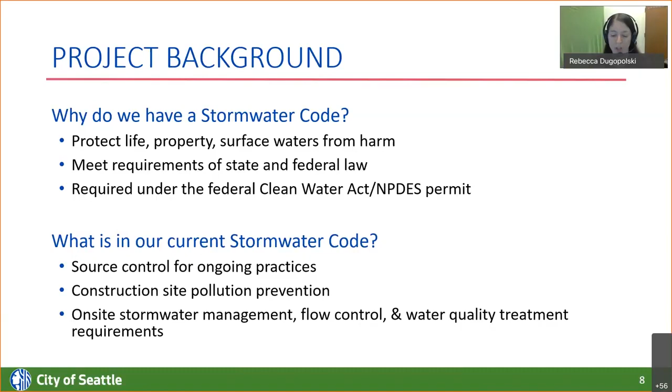I wanted to walk through a little bit of project background. Those of you who've joined past public meetings probably recognize these first couple slides. I always like to go back to why we have a stormwater code and manual, and the intent: to protect life, property, and surface waters from harm, meet requirements of state and federal law, and fulfill the Federal Clean Water Act and National Pollutant Discharge Elimination System permit. What's included in the current and future stormwater codes is source control for ongoing practices, construction site pollution prevention, and requirements for on-site stormwater management, flow control, and water quality treatment. That's just the high level—obviously there's a lot more in there.

A little bit of project background: this project is driven by the new Phase 1 permit that came out July 1st, 2019 and became effective August 1st, 2019, and also the subsequent update to the Ecology Manual, the Stormwater Management Manual for Western Washington. We've had internal city staff workshops and a series of meetings starting in summer and fall of 2019. We also had external outreach meetings starting back in October 2019, when we could still have in-person meetings.

Then we had two webinars with the release of the spring 2020 public review draft, and one public webinar last fall with release of a portion of the manual and code, focusing on Volume 1, Appendix B, Appendix I, and the Stormwater Code. This webinar today focuses on the full code and manual and related codes.

Here is the overall timeline and where we're at. So we've worked our way through the first and second public review, and we're here on the third public review. As I mentioned, that's the full manual, related codes, Director's Rules, and the full code as well. And then Sherell mentioned we're moving through the legislative process this spring and targeting that effective date of July 1st.

2021 to meet ecology's requirements. So I wanted to just jump forward of what we're focusing on. As I mentioned, the legislative process is coming up, so we'll have city council review and a public hearing associated with that process. And then we'll be working on implementation tools and training. So you'll see some things coming out later this year to support applicants and plan reviewers, and also trainings related to the manual updates.

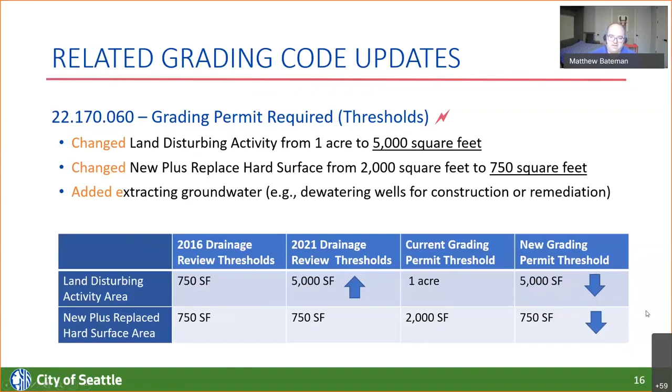For new and replaced hard surface, we're keeping the 750 square foot threshold for drainage review. And we're modifying the grading code so a permit is required when there is 750 square feet of new and replaced hard surface.

We also changed some of the exemptions. There was a utility exemption that exempted all utilities from grading permits, so we changed that so new installation will not be exempt in the ECAs. For new stormwater systems for short plats and subdivisions, especially those shown on the preliminary drainage plans, repair and maintenance will still be exempt for existing utilities, and utility installation outside of the ECAs will be exempt.

We removed the exemption for underground storage tank removal and replacement due to the potential impact those may have. And we revised the exemption for work on railroads to make it clear that if the drainage review is triggered for the stormwater code, you do need a grading permit. This is because the Stormwater Code administers a federal program, the Clean Water Act.

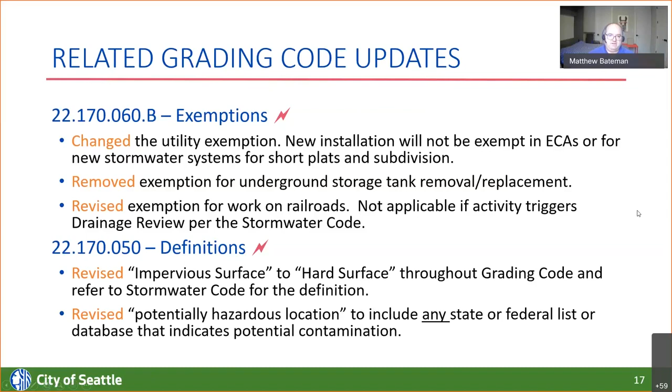So we changed some definitions. We went through to line up with the Stormwater Code and changed anywhere that said impervious surface to hard surface, referring to the Stormwater Code for the definition. We've also revised the definition of a potentially hazardous location to include any state or federal list or database that indicates potential contamination. Previously it was more specific, so we broadened that to capture any project that may have contamination.

We modified the plans and information required when there is a building permit, mostly to clarify when a separate grading permit or a separate grading plan will be required versus when the grading information can be shown on other plans, like site plans, drainage plans, or street use plans. And the biggest change is when a civil engineer is required, and it has to do with the stamping.

We also clarified which elements should be shown on the grading plan, and clarified that the site plan required with the grading permit shall be prepared per the department standards that will issue the permit. The one last thing we did is added back the authority for the geotechnical reviewers to require minimal risk statements by a geotechnical engineer in geologically hazardous areas. This is something that had been in past grading codes but was missing for some reason.

And so that wraps up the grading code. This grading code may come out sooner with some of the building code changes. It's a little up in the air because those are up in the air, so it may be pushed back and be more in line with the stormwater code, but it may come out a couple months ahead of the stormwater code.

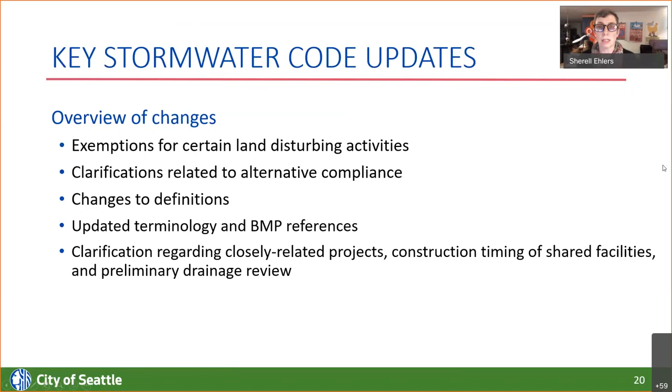Continuing that list, there's also adding minimum requirements for mainline extensions and the public drainage system, or clarifying them. Updates to on-site stormwater management lists for all project types, revision of flow control requirements for parcel-based projects and roadway projects, revising flow control standards, specifically adding an existing condition standard and updating the peak control standard, and also allowing for landscape management plans as an alternative to water quality for natural turf and landscaped areas.

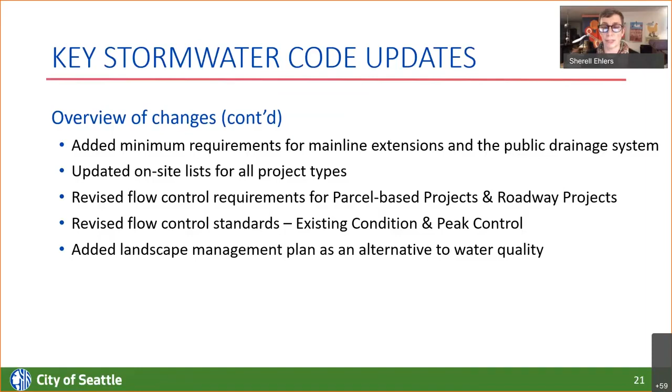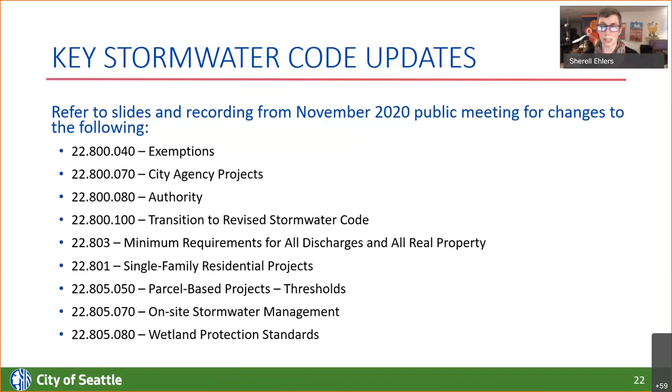Since there's a lot of information to cover today, we're not going to repeat what we talked about previously, as Rebecca mentioned. So the items shown on this slide were covered in the fall 2020 presentations. If you want to hear those presentations, you can go back and look at the PowerPoint and the recording. Today we'll just be focusing on what was changed since November.

So for definitions, most of the definitions shown here were updated and shown in the November 2020 public review, except for the following three definitions. And again, as Rebecca said, it's the red lightning bolt that signifies what has changed, just as a reminder.

We have added to the definition of drainage system curb and gutter as part of the drainage system, which aligns with our MS4 for municipal separate storm sewer system -- I'm missing an S in there -- National Pollutant Discharge Elimination System permit, or MS4 NPDES permit, aligning with that by adding curb and gutter. Then we updated the stream definition to be consistent with the creek definition we previously updated, though I didn't realize both creek and stream were in there. That's just to match the Washington Administrative Code typologies.

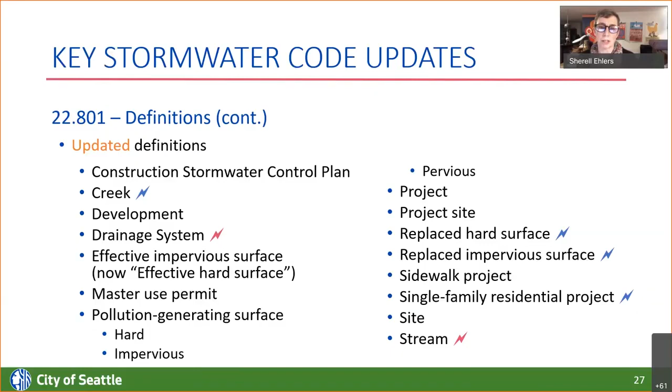And then we just added a definition for stormwater plans and specifications. So there's a lot of items here, but just the changes from previously.

In the section for minimum requirements for all projects, we revised the language based on feedback from the last review period, specifically related to updating the timing of construction of stormwater facilities that will serve multiple proposed lots, parcels, or tracts, based on the feedback we got regarding permit issuance of building permits and the like. So we revised that language based on that feedback.

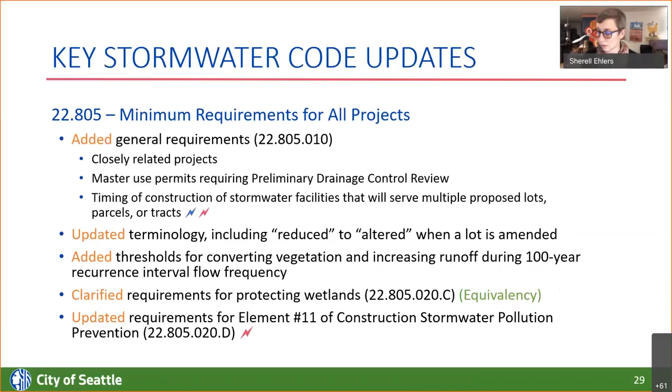We also added requirements in the source control section for all projects, requiring training for construction employees to prevent source control issues during construction, and also cleaning up any contaminated soil subject to spills during construction.

This section is about extensions of the public drainage system. In the current 2016 code, there's already a requirement to extend the storm drain, but that requirement was in the authority section of the code and sometimes was missed. So the requirement was added to the minimum requirements for all projects, just to be more transparent about when a project would have to extend the public drainage system.

Since we added that initial requirement based on private property, we have requirements associated with private property, such as what we're calling projects not conducted in the right of way -- in stormwater vernacular, parcel-based projects. It's similar to what the requirements are right now as enforced: if it's a large project greater than 5,000 square feet, new and replaced, and without a piped public drainage system -- the piped part is different -- abutting the public place, or other projects that pose hazards.

That section mirrors what was already in the authority section, but we also added a new requirement for projects conducted solely in the right of way. This basically applies to transportation capital projects, stating requirements for the public drainage system that were missing in the stormwater code before for transportation projects. So that is a new section in concept.

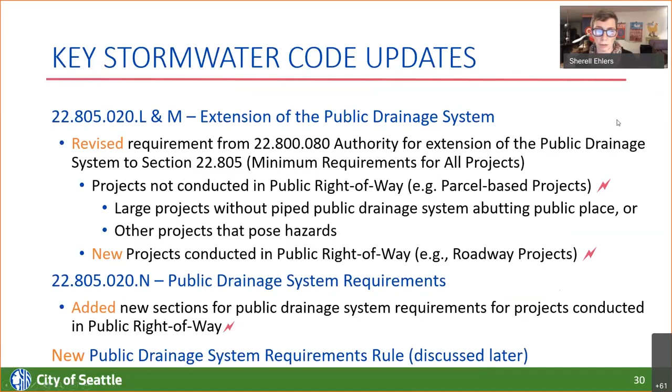We covered this slide in the last meeting, but since it's so comprehensive, I'll just go quickly through it. It basically talks about the thresholds for parcel-based projects and the change in threshold for single-family projects. What this table shows are the changes in thresholds, which are shown in bold.

One of our goals in updating the code and manual was simplifying things where we could. And that led to most projects aligning at a 5,000 square foot new plus replaced hard surface threshold.

With a few exceptions. Going through the list, the threshold for on-site stormwater management is not changing. It's still either 750 square feet or 1,500. That's the same.

For combined basins, an analysis was completed by the combined sewer team and determined that a smaller threshold for projects in the combined basin should be implemented to help mitigate the impacts of development. The current threshold for the combined is 10,000 square feet, and the proposed is 5,000. So you can see that it's aligning with that 5,000 square foot threshold as well, for both simplicity and system needs.

In mitigating impacts of development, for creeks and small lake basins, the threshold is currently 2,000 square feet, but that is proposed to be up to 5,000 square feet. So that's actually a less stringent threshold than what was previously in the 2016 code.

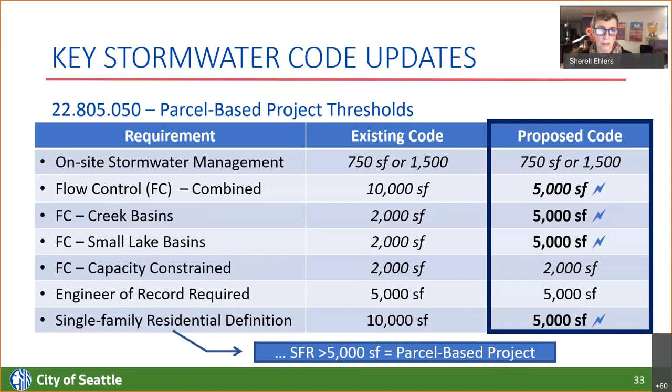So next, let's see, we're on the same. I'm looking at notes here and in the slides, so it's a little discombobulated.

For this current public review period, as I mentioned previously for the capacity constrained system, we said you don't have to do flow control if you can demonstrate there's downstream capacity, but just clarifying that that only includes ditches and culverts in the system.

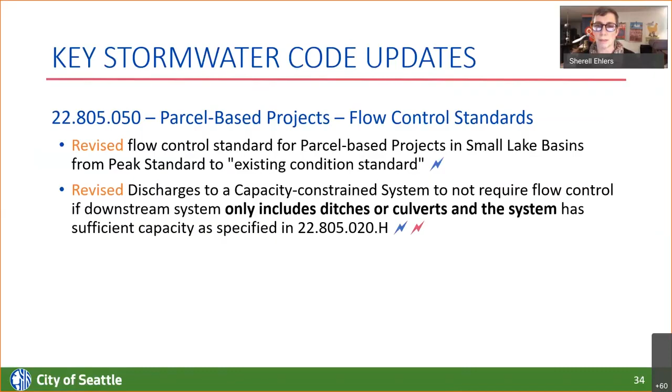Similarly, the same change has been updated for the roadway project. You can go to the next slide. The other bullets, like we've been saying, were presented in the fall 2020 presentation.

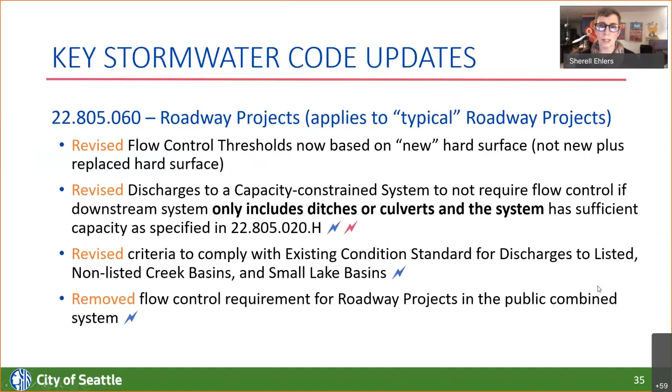These two next slides were presented last time, but I'll go over them again since most projects have to do on-site stormwater management. This slide highlights the changes that generally apply to single-family residential projects and parcel-based projects.

The first change is adding that infiltration trenches can be used for non-roof hard surfaces, but evaluation is not required. Also, this new BMP was added to category 2.

It's called the sidewalk trail compost amended strip. It's not the best name — if you have recommendations on naming that, please let us know. It's basically a CAVS and can be used in lieu of permeable pavement, and that new BMP can be used on any of the on-site lists.

We also moved the non-infiltrating bioretention, vegetated roofs, and rainwater harvesting down to category 4, which causes a shift for the former category 4 BMPs to become category 5. One of the reasons we did that is because we're reducing the size required of non-infiltrating bioretention.

Instead of being sized at the 5% area to match the infiltrating requirement, the sizing is only required to be the water quality sizing, which is a smaller size than is currently required now for non-infiltrating bioretention.

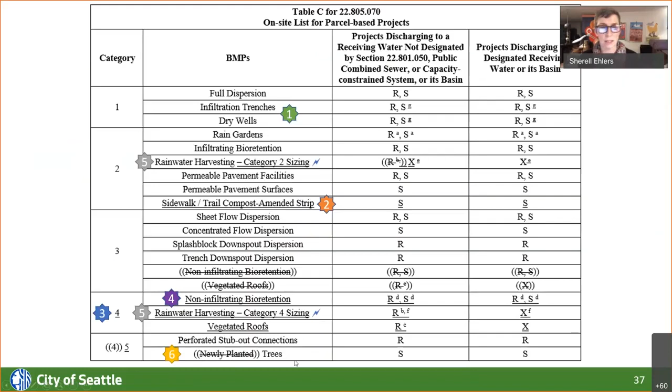For the trail and sidewalk project, similarly to the single family and parcel based project, this sidewalk trail compost amended strip has been added to category 2. And as a separate category at the bottom, trees have been added to both the trail and sidewalk projects as well as roadway projects.

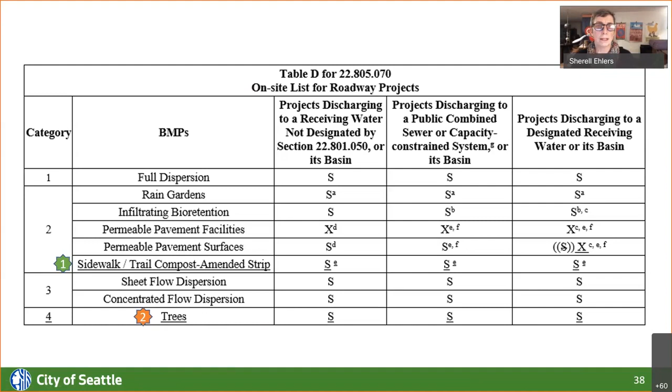So now moving on to flow control. I think I'm a little behind in time, so I'll try and speed it up.

For the 2021 Stormwater Code update, there's 2 changes related to flow control other than the wetland required changes from ecology. One is adding the existing condition standard. We talked about this last time, but previously the existing condition standard said you had to match up to the 50-year peak flow. It's been altered so that if you're a non-creek basin, you only have to match up to the 25-year peak flow, but if you're in a creek basin, you have to match up to the 50-year. That's because of equivalency with ecology's permit.

Basically, the existing condition mainly applies to small lake basins and roadway projects.

The other change for flow control is the peak standard was updated, to reflect downstream impacts of the project and to optimize control based on smaller storm events. The larger storm event standard is not changing, it's still 0.4 CFS per acre at the 25-year storm event, but a lower standard for the 2-year and a new standard for the 5-year are included at 0.07 and 0.1 CFS respectively.

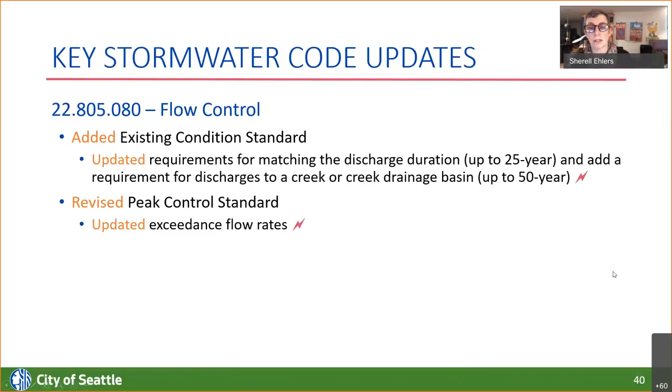The next few slides are similar to what I talked about last time. There's basically 3 different scenarios I'll go through in these 3 next slides. The first one is for infiltrating bioretention, and the 2 others are for detention vaults.

One thing to note is in the fall we had a higher standard. Basically what we're proposing today results in smaller BMPs than what was proposed in the fall.

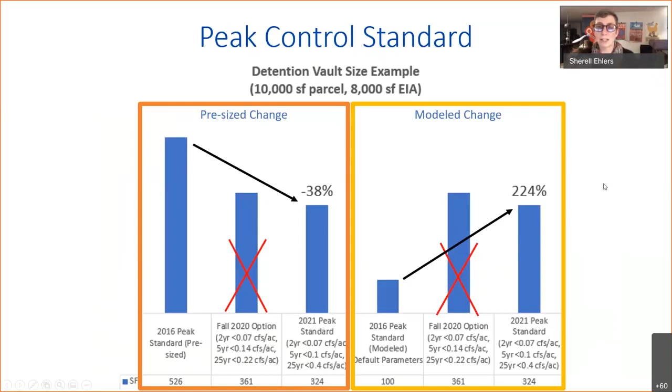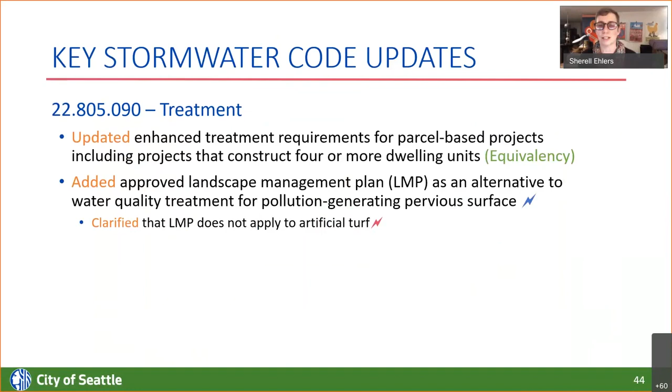So very quickly, once landscape management plans were allowed, we proposed, and Ecology accepted, that we could use landscape management plans in lieu of water quality requirements for pollution generating pervious surfaces. But we just needed to clarify that does not apply to artificial turf, just to be clear, because we don't want to have those discussions.

And finally, just two comments that we got from Ecology were making sure that we say you have to maintain or follow your landscape management plan, so we changed that. And then also, if you sell your property, you need to inform future owners that a landscape management plan exists and that you need to follow it.

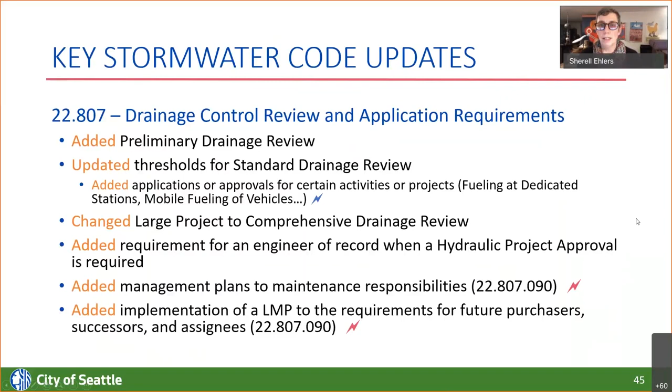And then now I'll go through this new director's rule, which further implements the code language that I just previously discussed.

So to help and support the implementation of the stormwater code, the city is creating a new SPU-specific director's rule. The content of the rule clarifies five sections of the stormwater code. The first three are existing stormwater code requirements, which include approved point of discharge, ensure sufficient capacity, and the requirements to extend a main line, which are in the authority section but are now included in the minimum requirements for all projects.

In addition, new language was added for mainline extensions for transportation projects. And then finally, just noting that you have to follow rules promulgated for the public drainage system is also part of this document. So going through the main parts that people are most interested in today...

Ensure sufficient capacity is existing code language and is not a new requirement in the code, but further clarification of this requirement is mainly taken from King County's stormwater manual, so this will all look very familiar if you're used to doing work in King County. The requirement is to mitigate the direct impacts of the project that would cause or increase downstream issues, and it's not intended to fix existing issues.

The rule further clarifies existing code language on performing a downstream erosion and capacity analysis a quarter mile downstream from the project discharge point. The analysis will be based on a 25-year event and most often applies to the ditch and culvert system that has limited capacity.

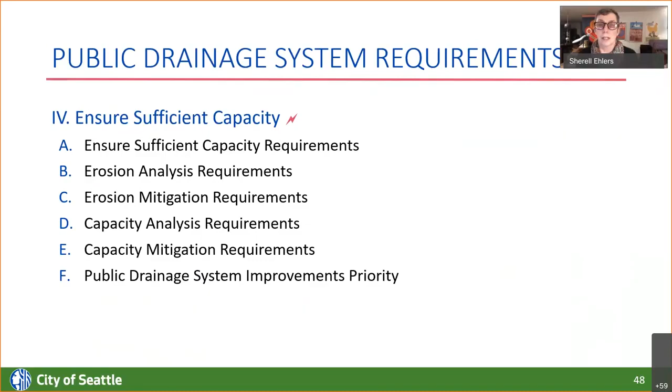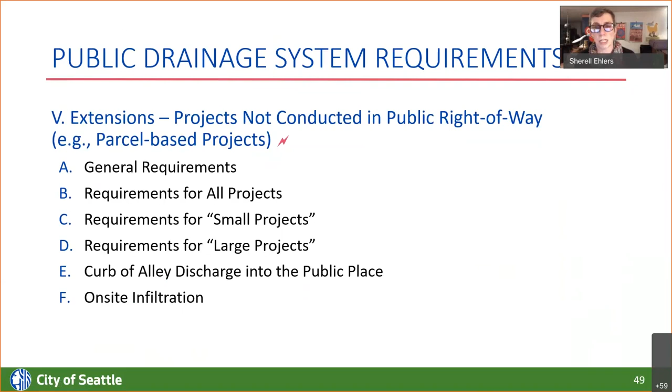And finally, the last part of the document is basically taking language from an existing client assistance memo, or CAM 1180, which a lot of you I'm sure are familiar with, and incorporating that into a rule, noting track changes from there so you can specifically see where the changes are from that existing client assistance memo. The requirements for this apply to the public drainage system and not public infrastructure. So that's my last slide, and I'll hand it back to Gretchen.

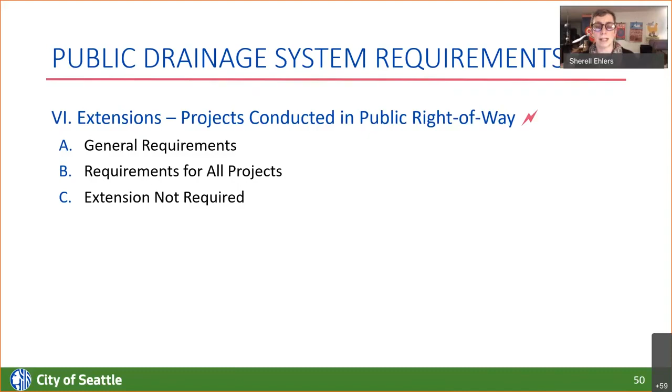And I'm a little bit over.

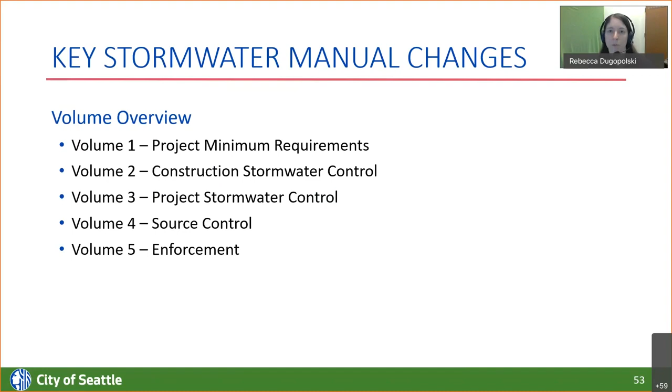Also, an errata sheet was posted today, and I'll be talking about that a little later, but it includes several updates to some of the proposed sizing tables in volume 3. Definitely take a look if you're interested in sizing factor updates, because that's the latest changes based on some recent modeling updates. I have a slide covering which tables that includes.

Volume 1, similar to the code, we talked about this pretty extensively during the November 2020 public meeting, so you can refer to those slides in the recording for the following sections listed here that we didn't change in the winter 2021 draft. If you're interested in these sections or chapters, make sure you take a look at those slides and recording from that last public meeting.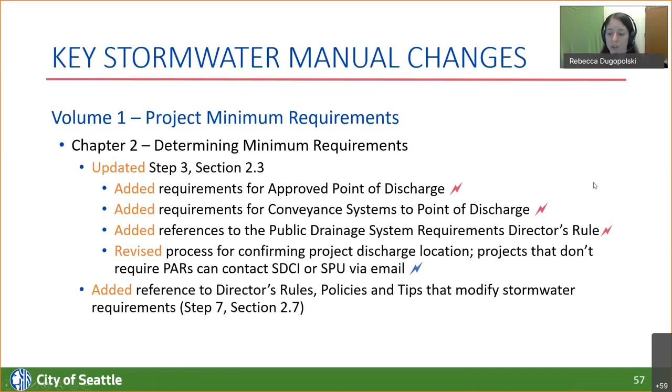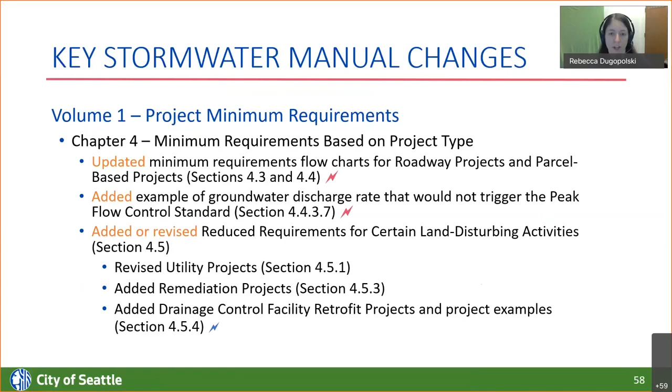We also added an example of a groundwater discharge rate that would not trigger the peak flow control standards. You can find that at section 4437. So that's my volume 1 — that was pretty fast. We did a lot of updates on volume 1 in the fall, but just a few minor tweaks here for the winter 2021 draft.

Also some pretty minor changes in volume 2. We just have one slide on volume 2 today, but wanted to highlight a couple things. You'll notice there's just the one red lightning bolt here under minor BMP revisions, and if you take a look at the summary of changes table, you'll note there are 5 different BMPs that have had revisions since the spring 2020 review draft.

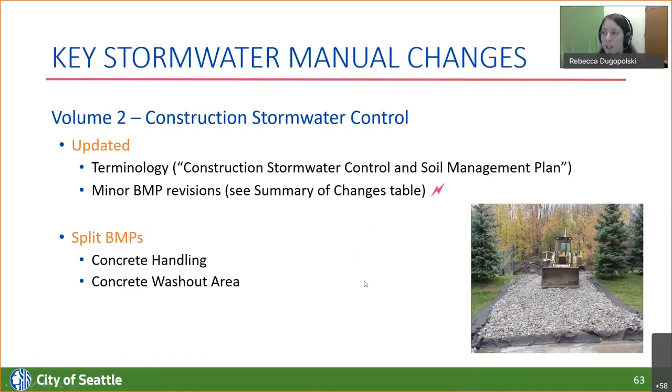Some pretty minor changes related to stabilized construction access, some minor changes in figure 14, which is in the filter fence section, some additional references in the building repair, remodeling, and construction BMP, clarified requirements for discharge structure and the temporary dewatering BMP, and also updated some of the timelines in table 9, which is the solid waste handling and disposal requirements related to recent updates there. Take a look at that in the summary of changes tables, and that'll walk you through the changes to volume 2.

Volume 3 is kind of where we want to spend most of our time today, since that's where we had the bulk of our changes in this latest draft, and the bulk of changes that those of you that work on BMP design are probably interested in as well.

So here again, I'm going to focus on the red lightning bolts. Many of these items have been further revised and clarified for this latest draft. There's one related to guidance on the infiltration investigation map — a fairly minor edit, but take a look at the language there for further clarification on how that should be applied. Figures, as I mentioned, are integrated into chapters 3 and 5 of volume 3, so take a look at those. There are also BMP updates and clarifications — we'll walk through these in more detail, but throughout chapter 5 there's further refinement on BMP design and sizing and the figures there as well.

We also added, as we mentioned previously, that new BMP — the sidewalk and trail compost amended strip — but we made some further refinements in that BMP, so we'll walk through what some of those changes are. Added some new figures, and also here's a reminder to adjust the HSPF parameters — I've got a couple slides related to this as well, so we'll walk through that.

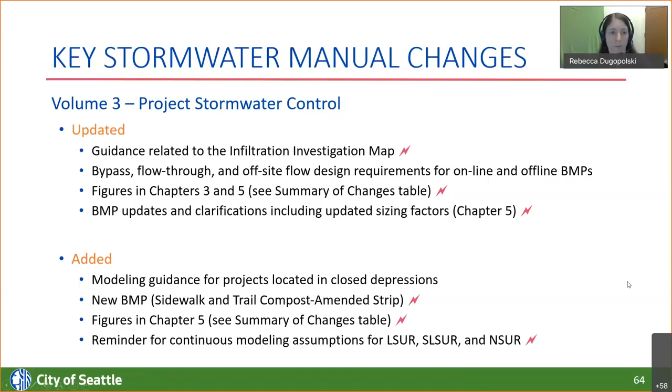Sherelle had mentioned there are some pretty substantial changes related to sizing when you're changing these HSPF parameters. So I wanted to point out, for those of you actually doing the modeling, where to find those in case you haven't done this modeling in a while. Those three parameters are LSUR, the overland flow length; SLSUR, the slope of overland flow; and NSUR, which is Manning's N.

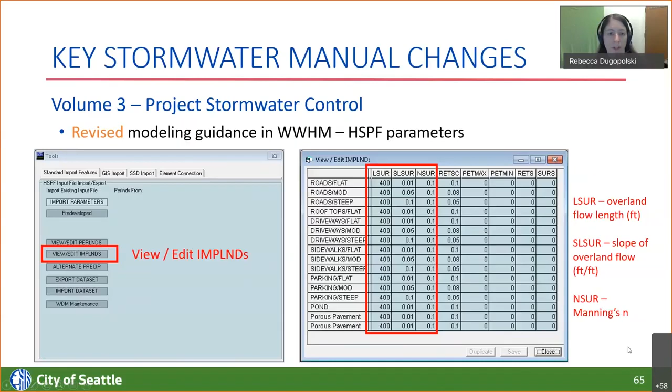Within WWHM, this is the Tools menu — there's View, Edit, Pervious and Impervious here. If you click on View, Edit Impervious, that's where you can change your LSUR, SLSUR, and NSUR for your different land use types. So that's where you find that in WWHM, and it will be highlighted in your output report, so you'll know which ones you've changed.

In MGS Flood, it's also on the Tools menu or Tools tab. Here it's under HSPF, runoff parameters, and parameter region, with three dots that say Edit HSPF Parameters. In MGS Flood, you get both your pervious and impervious on the same screen, and again LSUR, SLSUR, and NSUR are the three you should be changing. As you change these in MGS, it'll underline them in red so you'll know which ones you've changed, and that will also show up in your output report.

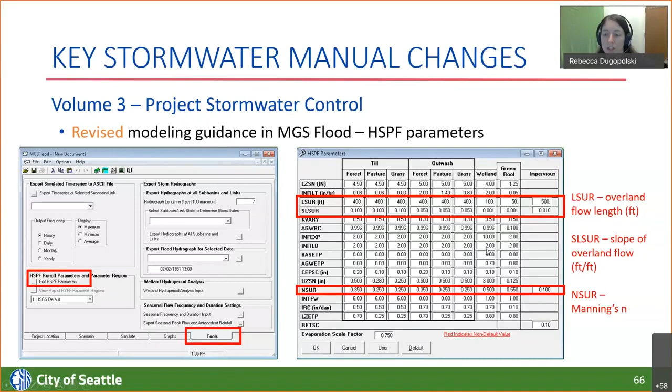Other changes in volume 3, starting with some of the overview chapters. In chapter 3, as I mentioned, we clarified guidance related to the infiltration investigation map, along with some clarifications related to water quality treatment and which BMPs apply. In chapter 4, we added a new subsection with modeling guidance for wetland hydroperiod protection, and added a reference to the new director's rule on public drainage system requirements. We also moved some content that was previously in chapter 4 — some shifted to volume 1 and some to the director's rule — so it's not taken away, just moved to another part of the manual. We also clarified where infiltration testing can be performed in section 4321.

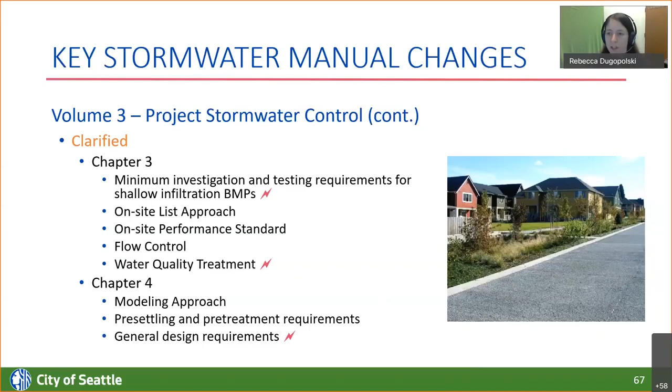A couple things I wanted to point out: the soil amendment BMP has a new figure. The sidewalk trail compost amended BMP — again, that new BMP Sherelle mentioned — we'll talk about in more detail in a couple slides. And for infiltrating bioretention, we clarified the design criteria related to mulch, updated the figures within that section, and also updated the sizing factors.

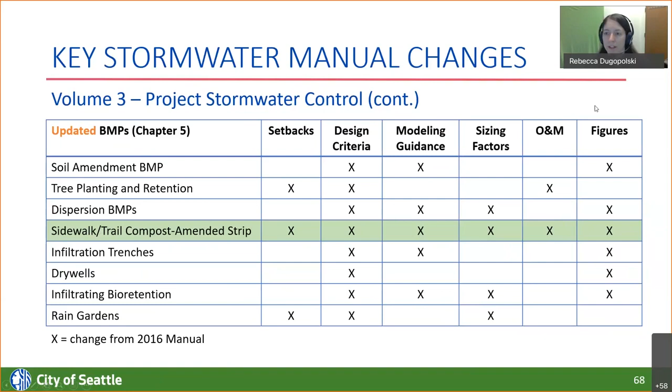Our next set of BMPs, permeable pavement facilities, that's one where we updated figure 5.17 and also updated the sizing factors. For infiltration chambers and vaults, I don't have a separate slide, but I wanted to note this has been updated pretty substantially from 2016. We didn't make a lot of changes for this latest round, but do take a look, there's a lot of new text and some updates and clarifications made since the spring 2020 draft.

Rainwater harvesting, again I don't have a separate slide for that, but Sherelle mentioned it's now listed in Category 2 and Category 4 of the on-site list. We did add some sizing guidance there, so if you're doing rainwater harvesting sizing, take a look at that. We also walked through some steps on how you would evaluate that within the modeling framework.

For detention ponds, pipes, and vaults and chambers, for detention ponds we only made minor revisions for this draft, but I'll be going over some of the design criteria that apply to all types of detention systems. Detention cisterns have no new edits other than the sizing factor updates in the errata sheet. And for other detention options not listed here, we didn't have any edits in that section.

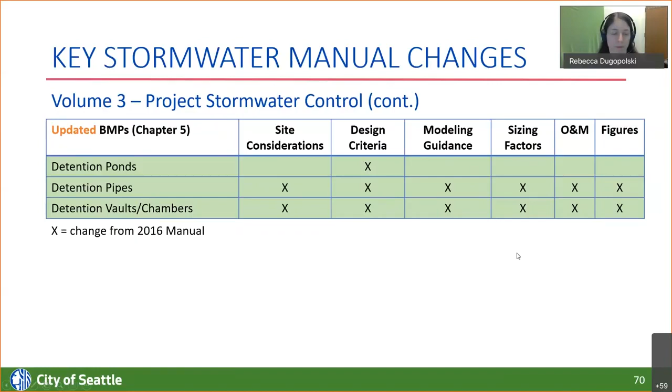On this slide we'll be talking about non-infiltrating bioretention in a couple slides, so we'll focus on that a bit more—that's another one that's been updated pretty substantially. Also just wanted to touch on proprietary and emerging water quality treatment technologies here at the end of Chapter 5.

I don't have a separate slide on this, but wanted to highlight that there was a BMP added back in the spring 2020 draft, the MWS linear modular wetland. We clarified the application of offline versus online flows when sizing those BMPs. You may also notice the current draft doesn't include any mass loading ratios, or MLRs, right now. That's something we were working on at the last minute to simplify that process and make things more consistent, to make it easier for vendors to get an MLR in place. We're still working on that process, so you'll notice some TBDs in that table within the section.

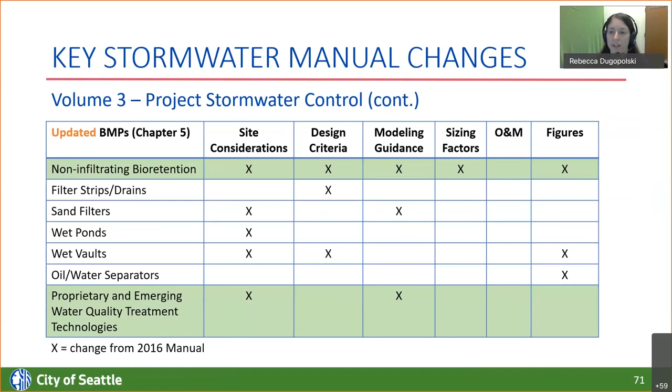So as I mentioned, I wanted to focus on some of these major changes that have been made either since the 2016 manual or this latest draft. Here are the areas I want to focus on today.

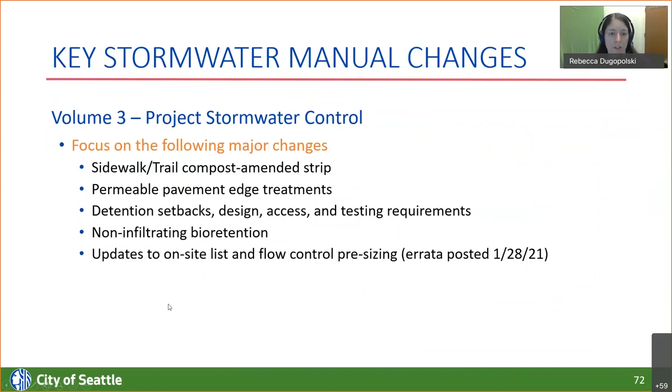We'll start with the sidewalk trail compost amended strip. As we noted, this is a new BMP, and the figure is also new and has been updated for this draft. A few reminders and clarifications for this latest draft: this BMP can be used for trails or sidewalks up to 25 feet wide. All widths—the hard surface, the BMP, the level spreader—are measured perpendicular to the edge of the hard surface adjacent to the BMP.

We also clarified the type of vegetation that's acceptable—turf or dense ground cover is typical, but additional shrubs and trees can also be added to the design. The overflow path must be vegetated and at least 10 feet from a building or property line, excluding the right-of-way. We also added sizing factors and clarified how to model the BMP explicitly.

On the next slide, we wanted to point out a couple new figures. These haven't been updated since the spring 2020 draft, but just wanted to note figure 5.19 and 5.20—there's a concrete edge example and a geomembrane edge example. These are both examples of possible edge treatments, but the city will also allow other options, including proprietary ones. This just helps provide guidance on what different types of edge treatments can be used for permeable pavement.

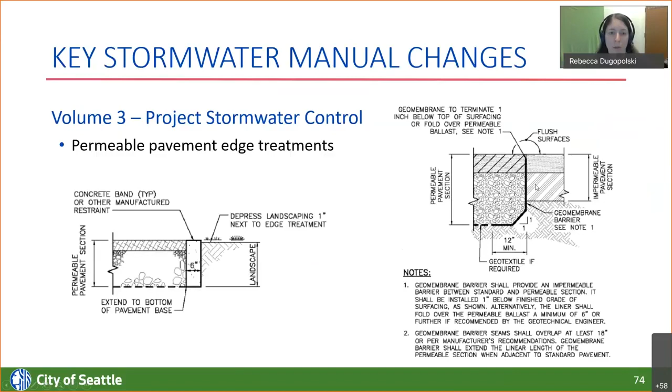Detention ponds, pipes, and vaults and chambers—wanted to note that these setbacks were added previously, but since it's a big change from the 2016 manual, I wanted to highlight some of these items today. These are added setbacks for all detention BMPs from ECA steep slopes and landslide prone areas when geotechnical analysis is required. For these three types or iterations of these BMPs, there's a 200-foot setback from the ECA steep slope or landslide prone areas.

So if you're using a modular stackable chamber, such as an R-tank, a detention chamber with an open bottom, or a CMP detention pipe, then you've got this 200-foot setback. We've also added design criteria for modular stackable chambers—that's a change from the 2016 manual—and revised and clarified exfiltration testing requirements for both pipes and vaults.

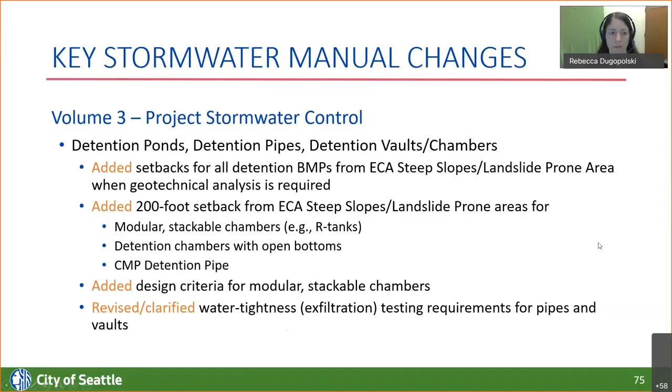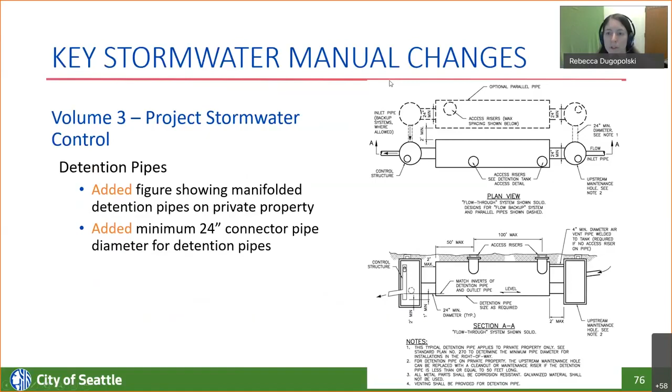Looking at detention pipes specifically, there's a new figure 5.26 that shows manifolded detention pipes on private property. And we added a minimum 24-inch connector pipe diameter for detention pipes, which you'll note on the figure.

Non-infiltrating bioretention was also a BMP that had some pretty significant updates from the 2016 manual. There's an added setback from the top of the ECA steep slope landslide prone area. We've got revised liner requirements that refer you to Appendix E, and a reference clarifying the land use code section looking at front, side, and rear yard setbacks. Also noting that storage capacity doesn't apply to non-infiltrating bioretention.

And reduced sizing factors when used for the on-site stormwater management list approach, so that's more aligned with the water quality treatment sizing — the sizing factors have gone down. Also wanted to note that using non-infiltrating bioretention to meet the peak control standard is no longer applicable. With the new standard, we found that it really just can't meet the peak standard, so there are changes in the table related to that.

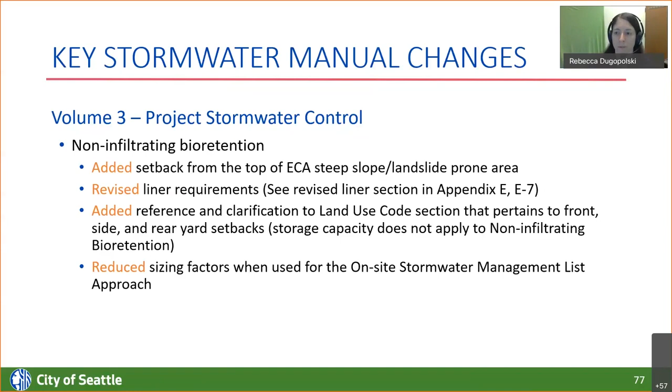The last thing I wanted to point out, as I mentioned, there's an errata sheet that was just posted today, and it was up on the website recently. So when Matthew does his walkthrough at the end, he can point you towards where that is. There were changes to 8 different sizing tables — 3 of those are related to on-site list sizing for infiltrating bioretention, rain gardens, and non-infiltrating bioretention.

There's also pre-size flow control credits that have been updated for permeable pavement surfaces. We've also distinguished that that's now with and without check dams, since with the latest model update there are some pretty significant changes depending on whether you're modeling with or without a check dam. So that's been added to the table there.

For detention pipes, vaults, and detention cisterns, that's one where we added or modified the contributing area ranges. And as Cheryl mentioned, we also added the orifice diameters to make clear what was used for the pre-sizing.

And then, as I mentioned, for non-infiltrating bioretention, the peak control standard is now not allowed for 12 inches of ponding, where it was previously. So that's the list of tables that have been updated.

Volume 4, we just have one slide here, so fairly minor revisions in the winter 2021 public review draft — those were in BMP 3, 9, and 16, if you want to take a look at those in the summary of changes table. Also the rooftop dog run BMP, which is our new BMP 8, got updated, so there are some changes there. And then referencing the landscape management plan and integrated pest management plans, which are now in Appendix I, that got added as well — some additional links and clarifications you may want to take a look at if you use Volume 4.

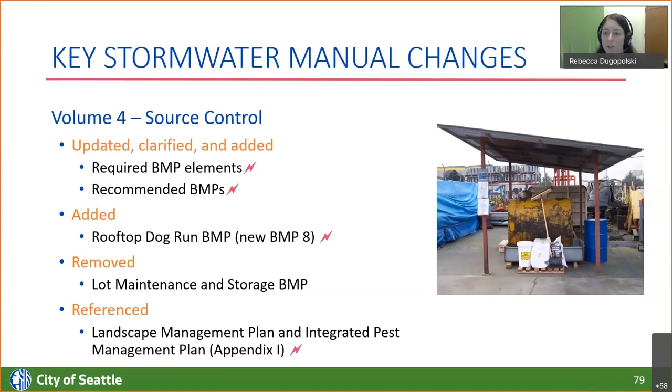All right, next I'm going to cover our changes in the appendices. Here's our list — we've now got Appendix A through I. You'll note that Appendix B used to be related to Volume 2, and is now repurposed and related to Volume 1. And Appendix I got expanded to add the landscape management plan requirements, if you took a look at that during our last public review period in the fall.

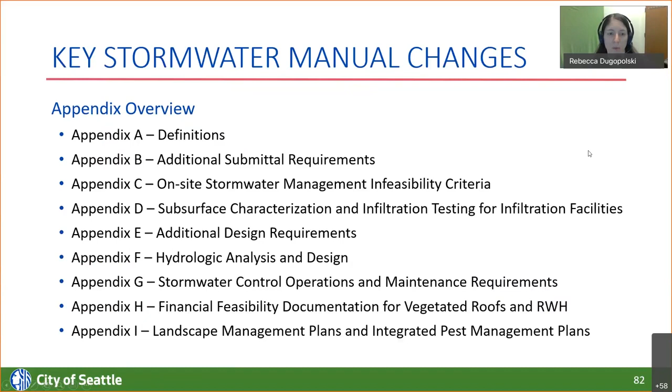So Appendix A is the definitions appendix right now — that's just a placeholder and refers to the code, but it will be populated for the final manual. Matthew, did you want to jump in and briefly cover updates to Appendix B? Yeah, Appendix B has 2 sections, and the first one is meant to describe the drainage review process for MUPs, especially subdivisions, short plats, lot boundary adjustments, and unit lot subdivisions. We did some further refinement in those sections that you should take a look at.

Also, the timing for full subdivisions and short subdivisions of when the shared stormwater facilities, we tweaked that code language just slightly, just to make it a little more flexible for developers.

And we've described some of the utility easements that will be required on plats, and I expanded the section on the lot boundary adjustments. So this is a brand new section, so I encourage everybody to go through and take a look. If you still have questions about what's happened, what's going on for drainage review for MUPs, please

let me know. Please comment, and we can try to address that. And the other section is just kind of the drainage report format and content. So we made a few more clarifications and refinements in there, and clarified that you may not need everything in this. It's not going to be a strict adherence to this form, but it shows you all the elements that may be required. Okay.

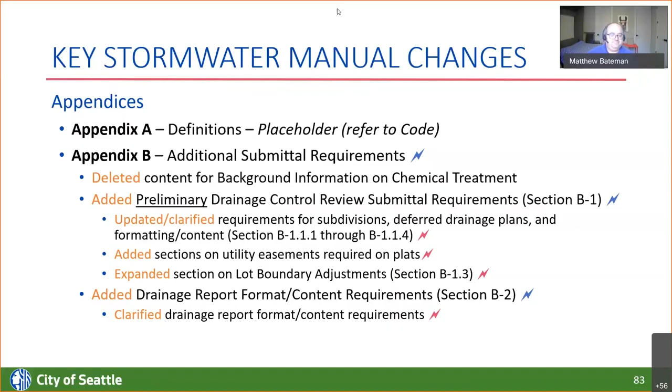All right, and I think you've only got one slide this time, so all in one slide. But Matthew had some more detailed information that he presented back in the fall. So if you're interested in some more detail behind Appendix B, that's there, or just take a look at it and read through it. So great, thanks, Matthew.

I wanted to also cover Appendix C. There were a few updates to the on-site stormwater management infeasibility criteria. So the main things I wanted to highlight here were related to added and revised infeasibility criteria.

This first one is just a clarification. It's not a change in the requirements. So there was kind of this petroleum, chemical, liquid, hazardous waste storage tank note kind of tucked in at the end. So we just integrated that to make that a little bit cleaner language there. So that's not a change, just a modification of the current language.

There is a new infeasibility criterion related to skate parks, bike parks, and sport courts for permeable pavement facilities and permeable pavement surfaces. So that got added in Table C3. The infeasibility criteria for sidewalk, trail, compost amended strips got added as well, so you could take a look at those also in Table C3. And then there's 3 new infeasibility criteria for non-infiltrating bioretention that you can find in Table C5.

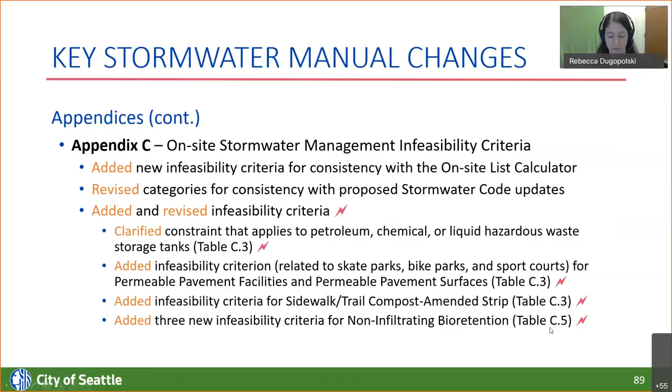Appendix D had some pretty minor changes for this draft. So there are some pretty minor clarifications in the groundwater monitoring section, D5, one minor modification in section D8.1. And then I think the main changes came in this acceptance testing requirements section, D-8.2. Mainly just clarifying that step 1, observation of subsurface conditions, and step 2, infiltration testing of differing soil conditions, those are recommended but optional. And step 3, which is your acceptance testing of your backfilled BMP, is a required step. So you can find that in section D-8.2.

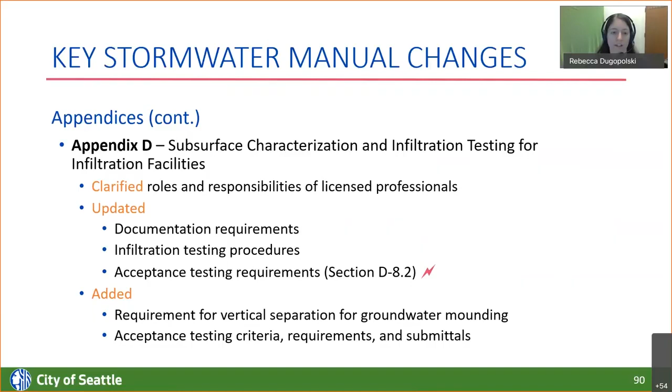In Appendix E, there's some minor changes scattered throughout. The main thing here, some updates to the plant list. Really, that was just adding design and O&M considerations based on a review by a landscape architect. Removed a couple of species due to winter dieback and availability of other species that are better suited for bioretention function, and some things that require extremely wet conditions.

So just taking a look at some of the species that were listed in there. There's a few changes, a few things got removed. Some others were aggressive spreaders and things like that, so a few species did come off that list.

Also in the latter part of Appendix E, there's a section on dry well sizing. So there's a new table that got added there, Table E27, for dry well sizing downstream of bioretention sized for the on-site stormwater management standard. And the preceding tables to that, we also reincorporated the sizing factors that were in the 2016 manual, so those got added back in, but there's this new table at the end.

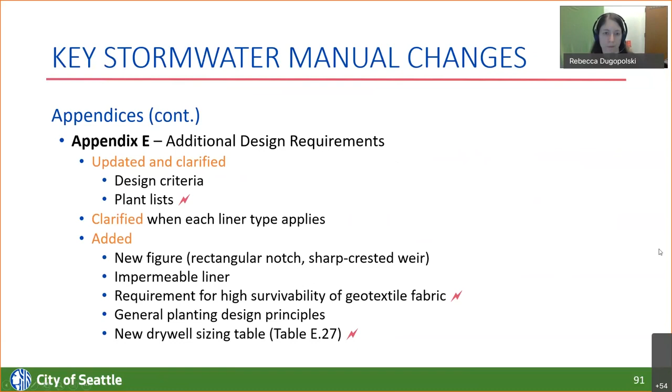For Appendix F, some fairly minor changes here. We added a section on, or added some language on the required HSPF parameter modifications, which I mentioned previously and had those couple of slides with the screenshots from WWHM and MGS Flood. We also added some language from the ecology manual on how the flow duration standard is calculated in continuous model. So that's something that's already kind of baked into the models, but it's helpful to have that background language to know how it's actually calculating the flow duration standard. So we folded in that language there.

There's a new updated rain gauge figure and some updated text and a figure related to tidal influence and sea level rise, so those got updated based on some recent references. And then some additional text related to how the on-site performance standard is applied in the latest version of MGS Flood. There was some older language in there, so we just updated that to be a little more clear with how the models actually apply that standard and calculate that standard.

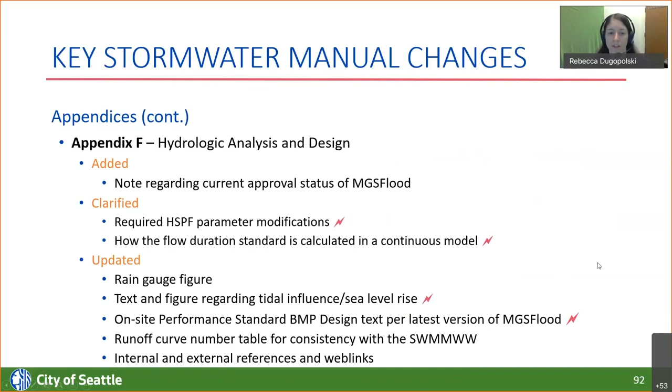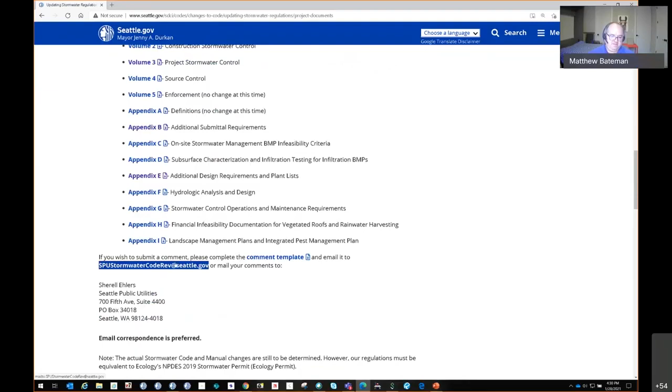We've got the draft grading code in here, and there's a small draft land use code that we're going to implement. And then we have each of the volumes of the stormwater manual in here, along with all the appendices, and another link to the comment template and the email address. We also have some general background about the stormwater code manual, and an overall timeline.

So I'll stop sharing now and give it back to Gretchen. Excellent, thanks so much, Matthew.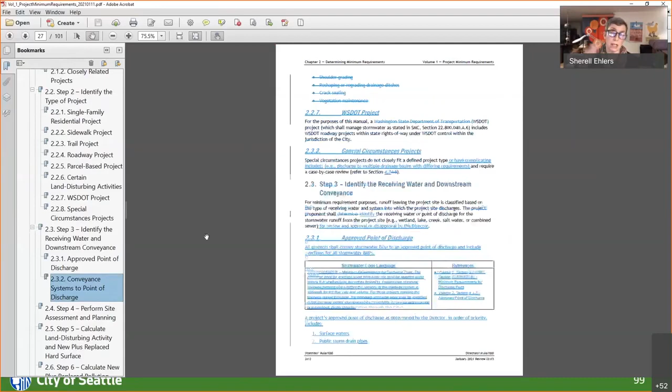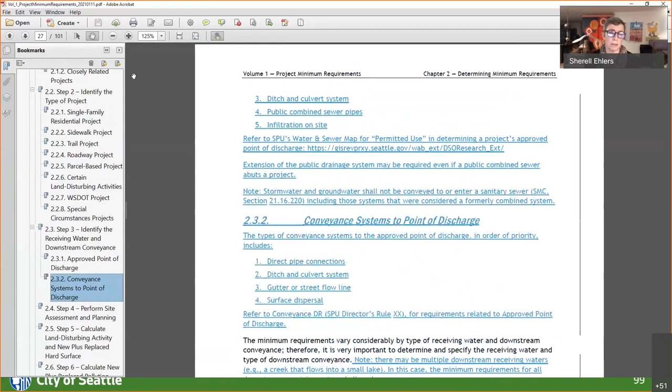So this isn't new language, it's actually just taken from Volume 3 and moved up to Volume 1. When it says infiltration, it basically means you need to go to a water body, connect to a public drainage system, and then it goes down the list to connect to combined, and then on-site infiltration. We still want infiltration through on-site stormwater BMPs, but for the larger storm events, tying into the city system is what the priority list is about.

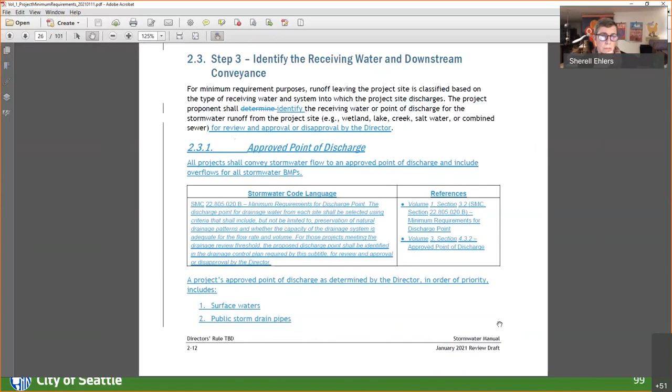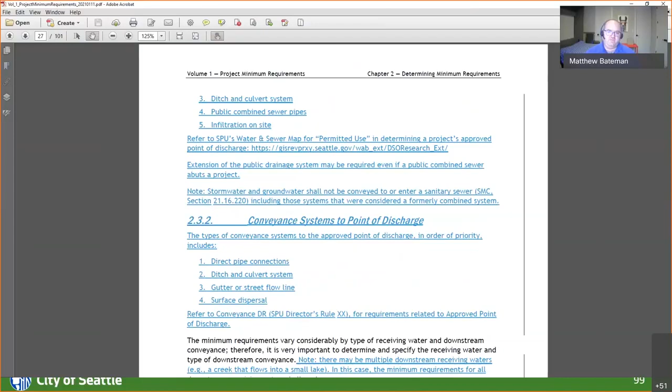That doesn't mean we're not wanting infiltration for the smaller storm events through the on-site stormwater management requirement. And most infiltrating BMPs have overflows, they're not designed to take on all of the drainage for the entire precipitation time series being modeled, so they do require overflow. That's where these approved points of discharge really come in.

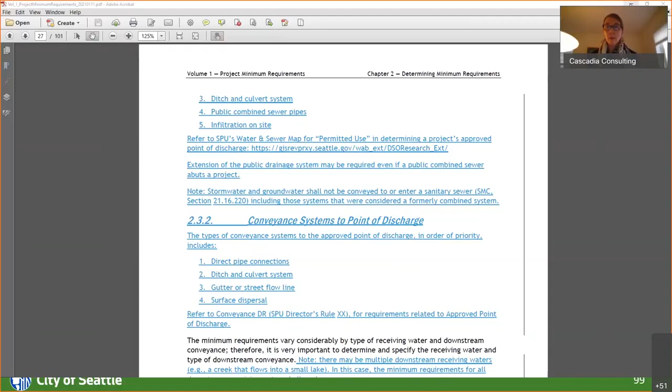Next question is from Lori Farr. For the fields, with respect to infiltration testing, where infiltration rates are less than 0.3 inch per hour and not measurable by typical practices, would the city consider allowing falling head infiltration testing or other testing?

Matthew or Mary, can you answer that question? No, I think we would stick with the infiltration testing requirements that are in the manual.

Next question here is from Guy Callie. In addition to detention pipes, will the manual revisions allow or address detention vaults for road projects, since they are more efficient at storing runoff?

I don't think the stormwater code really addresses that, that would be if they're in the road. It's more of SDOT and SPU review and their policies. I think SDOT and SPU still want to avoid vaults and pipes in the road where possible, just because of all the congestion it causes.

Matthew's right, and a lot of times the vaults don't fit. It's also a maintenance issue and about what the long-term asset requirements are for the city once it takes over that infrastructure. So the stormwater code, like Matthew said, is silent on that in the right of way.

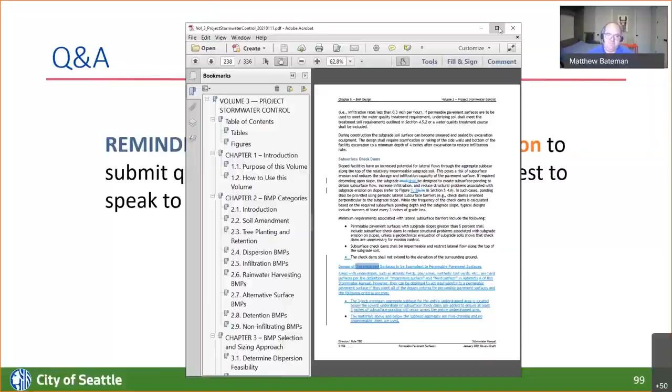I did add a clarification, Jennifer, in Volume 1, for the areas that are hydraulically connected to that French drain through free-draining material. That's the extent of the areas for French drains or underdrains that would be considered hard surfaces. So just putting a single French drain in the middle of a grass field doesn't make the whole grass field a hard surface, but just those areas that are hydraulically connected through a quick-draining surface or gravel.

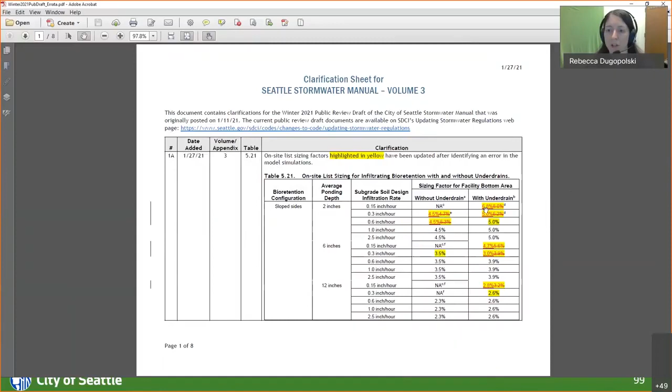So this is one thing - I'm not sure if we're talking about infiltrating bioretention or not, but with the revised factors here highlighted in yellow, they're actually getting slightly smaller with the revised modeling. Make sure you take a look at the errata. As Sherell mentioned, with the Van Genuchten model we found they were actually getting slightly smaller rather than larger. So some of these sizing factors that look like they were jumping up in the posted version of volume 3 are actually going down slightly in the errata.

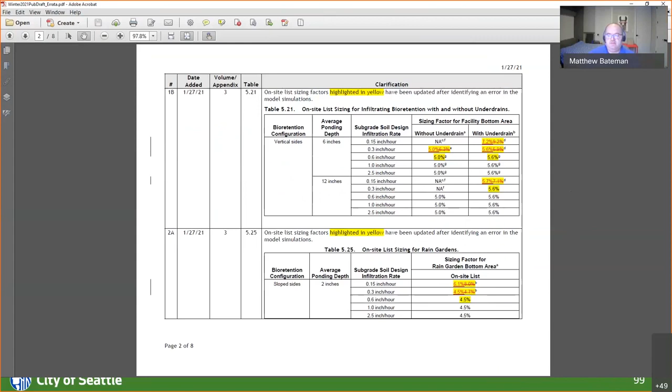I don't know if that addresses the question or not. Are they going down or staying the same? I think staying the same. Yep, you're right. There's a follow-up point here from Lisa: you said that if we model, the sizes are getting bigger, and she references a chart that said 80% bigger. I think that's your slide from the presentation.

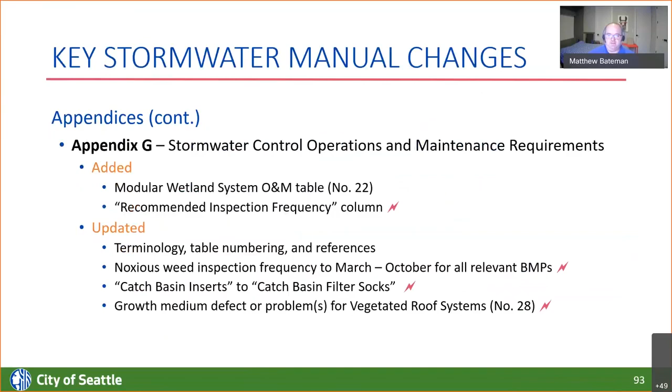Sherell, do you want me to pull that up? Sure, let's see if I can. I think those were for infiltrating bioretention, but non-infiltrating is not even going to be able to meet the peak standard anymore, and making it even bigger will make it detain even less.

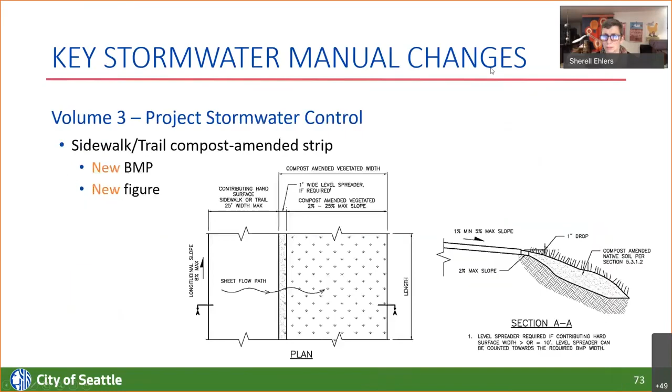Right, maybe while we get there I'll ask another question from Payal: in volume 3, a section was added for wetland hydro period protection. It's not clear when this analysis is required to be performed. When is this modeling required?

In the Stormwater Code, and probably volume 1 as well - I'm more familiar with the code than the manual - it talks about when hydro period protection is required, and it's probably not going to happen very often, if ever, in the city of Seattle.

It's when you have a class 1 or class 2 wetland, and you have access to the wetland - I can't even remember the certain kind of wetland that isn't very common in the city of Seattle. This is a requirement from ecology, and it would probably apply outside the city of Seattle too. The Stormwater Code talks about when you'd have to do the wetland hydro period protection, and gives a bunch of different criteria for that.

So, Matthew, do you have anything else you want to add to that? Yeah, there may be a few class 1 or 2 wetlands.

I think it's riverine, impounding, or depressional wetlands, but most of the wetlands in Seattle are not, and you may not have access to those when your project discharges to them. So most projects will just go back to the old method from the previous manual. But there's also some wetlands where you'll need to do a wetland categorization, and some wetlands won't even require modeling, just some general wetland protection BMPs.